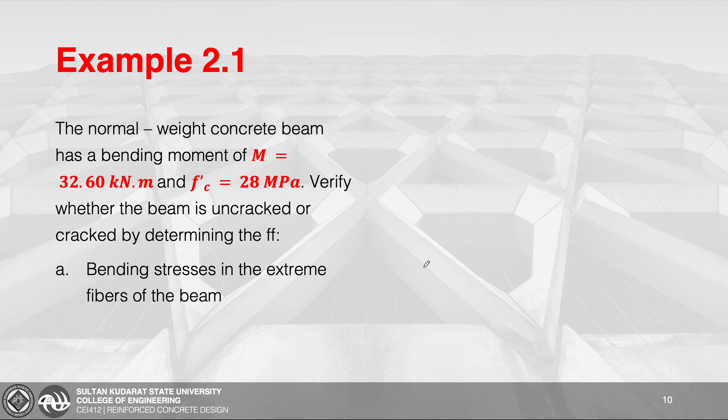So we have here example 2.1. The normal weight concrete beam has a bending moment of M, which is equivalent to 32.6 kilonewton meter, and the Fc prime is equivalent to 28 megapascal. Verify whether the beam is uncracked or cracked by determining the following. Letter A, the bending stresses in the extreme fibers of the beam, and letter B, the cracking moment of the section.

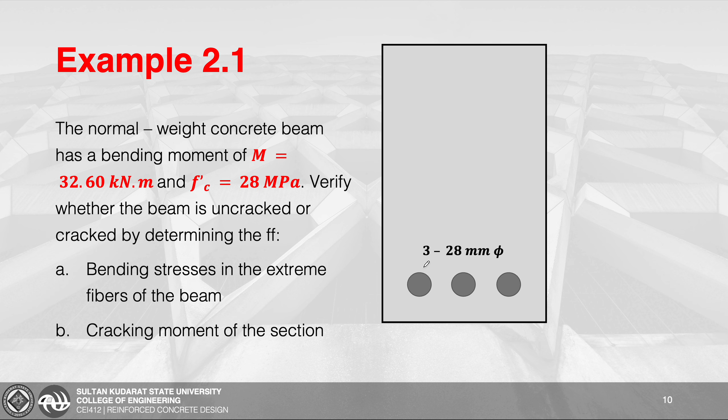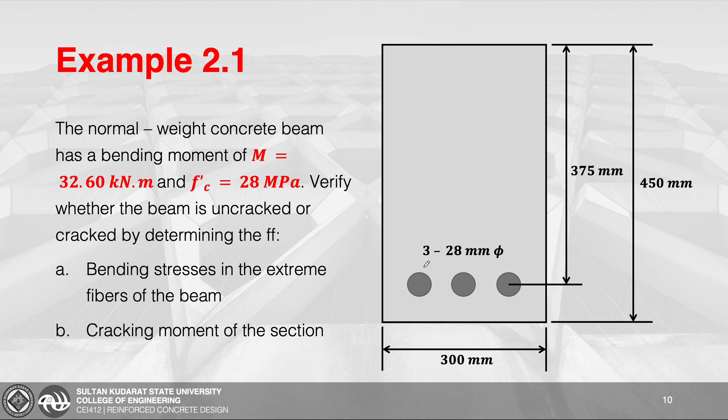So ito yung cross-section natin, rectangular. And we have here 3 na 28 mm diameter na rebars. The width of our beam is 300 millimeters. The total depth is 450 millimeters. And we have here the effective depth, which is 375 millimeters, and our steel covering na 75 millimeters.

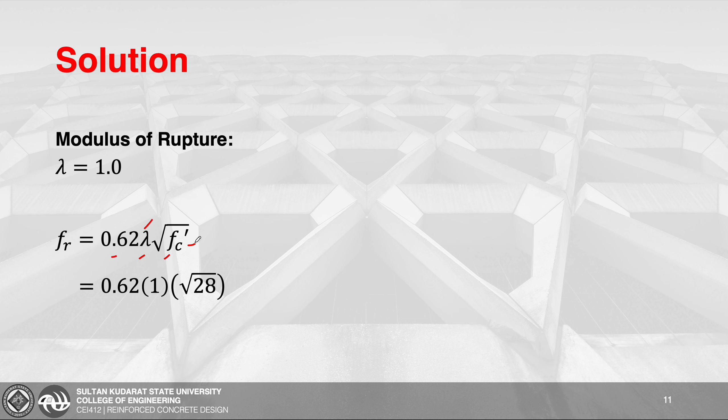So for our solution, we have here the modulus of rupture. Since normal weight yung concrete natin, yung lambda is equivalent to 1.0 based on the code. And the equation for our modulus of rupture is taken to be 0.62 lambda the square root of our Fc prime. By substituting the values for our lambda and our Fc prime, we'll get the value for our modulus of rupture to be equivalent to 3.2807 megapascal.

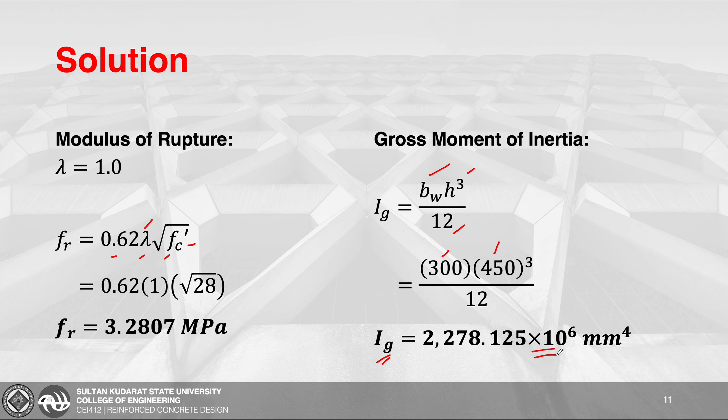For our gross moment of inertia, since rectangular yung cross-section natin, so BH cube all over 12 yung ating equation. So by substituting the values for our width and our total depth, we'll get the value for our gross moment of inertia to be equivalent to 2,278.125 times 10 to the power of 6 millimeters to the fourth power. Now, take note na dapat consistent yung ating format when it comes to the moment of inertia. So, dapat naka-scientific notation tayo na times 10 to the power of 6 for consistency of our calculation.

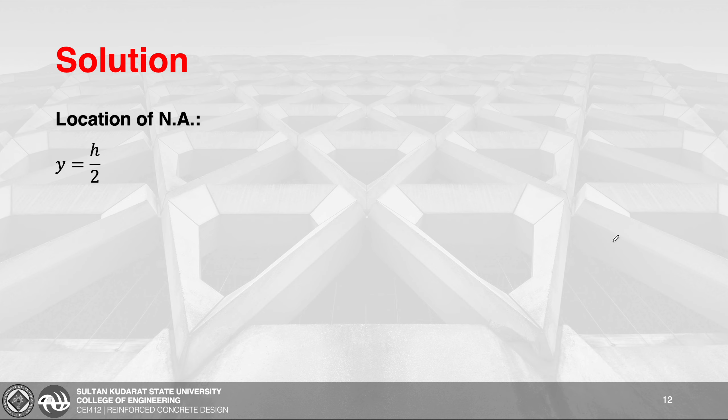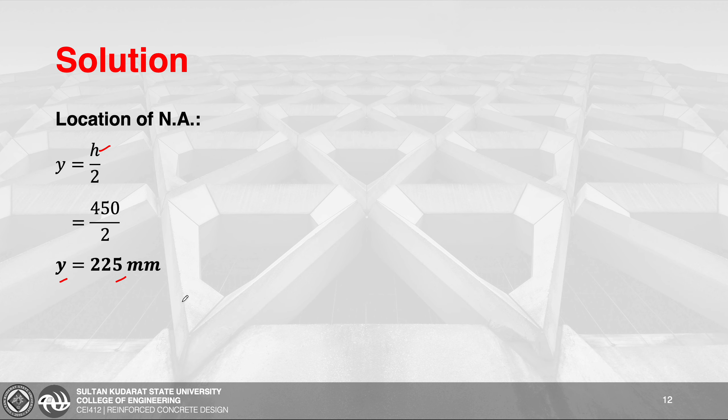Another is the location of our neutral axis. Since rectangular yung cross-section natin, so yung centroid nito is h all over 2. So, by substituting the value for our total depth, our location of our neutral axis na y is equivalent to 225 millimeters. Then for our bending stress, this is now equivalent to M times y all over our Ig.

So if we're going to substitute the value for our moment na 32.6, take note yung given sa problem natin, yung unit of moment is naka-kilonewton meter. So we still have to convert it to newton times millimeter. So to convert it, meron tayong conversion factor dito na times 10 to the power of 6. Next, is-substitute yung value ng y na 225, and of course, yung gross moment of inertia natin na 2,278.125 times 10 to the power of 6. So we'll get our bending stress sa tension to be 3.2198 megapascal. Now, we're going to compare it dun sa modulus of rupture.

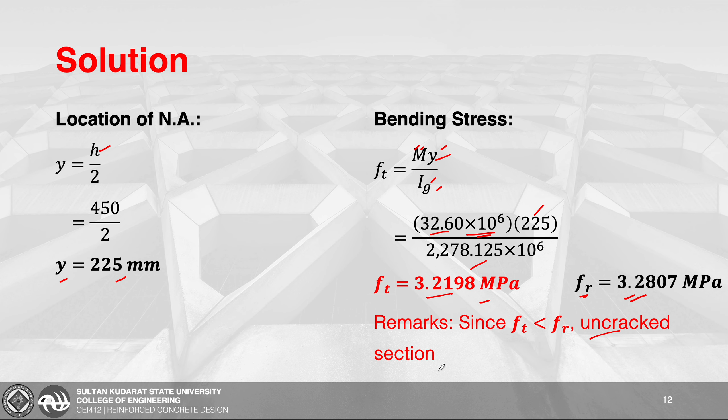Now, since yung bending stress natin is only 3.2198 and it is less than sa ating modulus of rupture, therefore, yung section natin is uncracked. In terms of moment naman, the cracking moment. Before we solve the cracking moment, define muna natin yung y sub t natin to be equivalent to y, 225 millimeters, since symmetrical lang naman yung section, rectangular lang. So ito yung equation natin for our cracking moment. This is equivalent to FR Ig all over our yt.

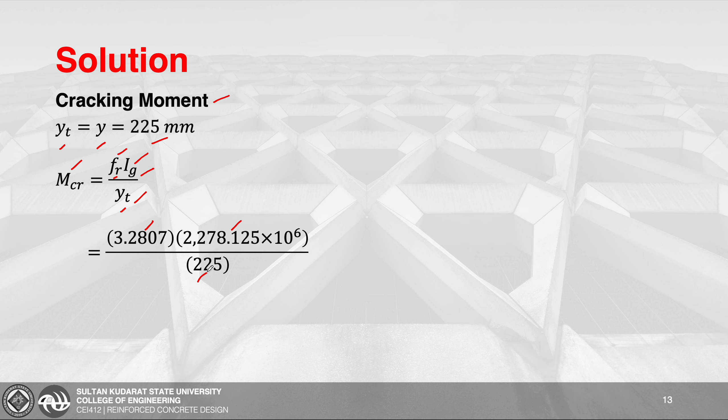So by direct substitution, yung F sub R natin is 3.2807, yung Ig is this value, then yung y sub t na 225, we'll get a value here of 33.22 kilonewton meter. Now take note medyo mataas yung value if we're going to solve this. But then, take note na yung unit nito is naka-newton times millimeter. So, para ma-convert natin sa kilonewton meter, we have to divide it by 10 to the power of 6. So, yung cracking moment natin is 33.22 kilonewton meter.

Now, yung given na service load moment natin is 32.6, and this is less than sa ating cracking moment. If that is the case, therefore, uncracked yung ating section.